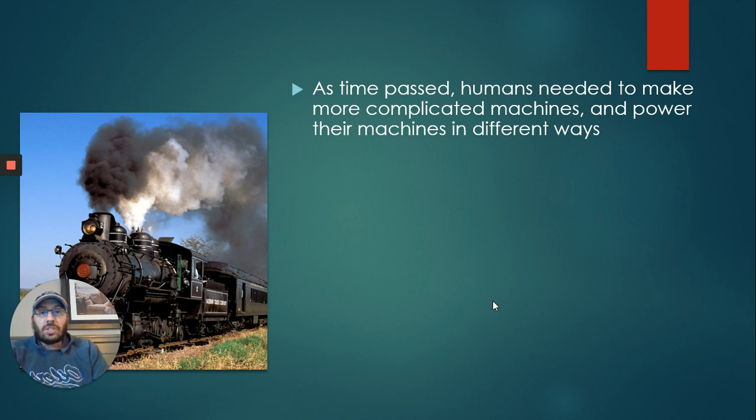Let's go through complex machines. There's a choo-choo train. As time passed, humans needed to make more complicated machines. We just finished talking about simple machines like the lever, the plane, the pulley. Now we're talking about more complicated machines. Because we were starting to make these more complicated machines, we needed to power them in different ways.

Within the last two centuries, a big giant revolution came through, and engineers and inventors developed machines and devices at an amazing rate. These things used energies such as coal, oil, and electricity to run. This new technology and energy sources helped begin the Industrial Revolution. You may have learned about that in social, or you will in the future, but industries changed in a very quick way.

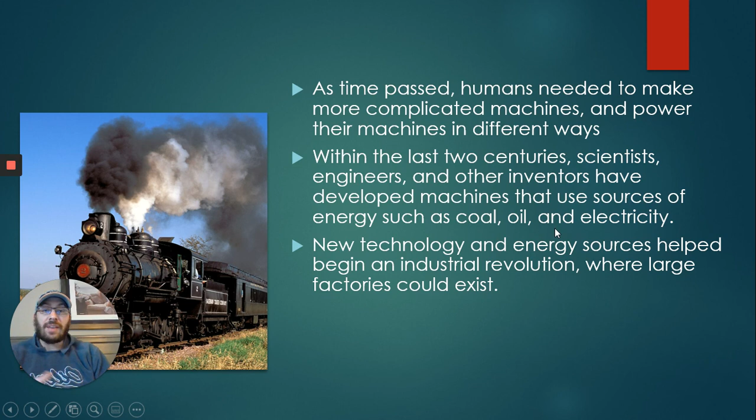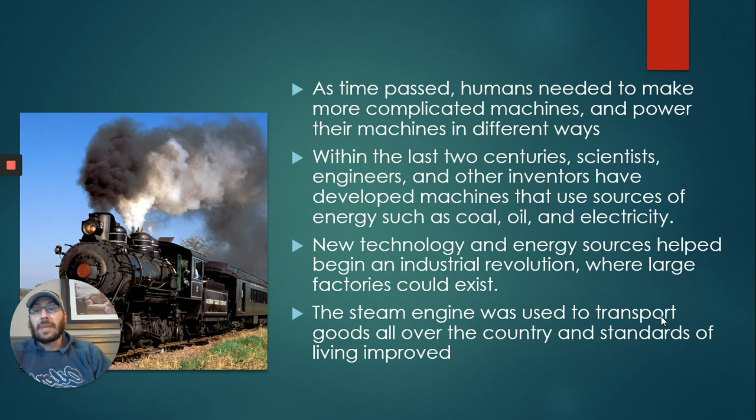Large factories were starting to exist where before there were none. But in order to get to these large factories, we needed machines that went very quickly and very far distances. That's where the steam engine came in. The steam engine was used to transport goods and larger items all over the country, and when something like this happened, the standards of living improved.

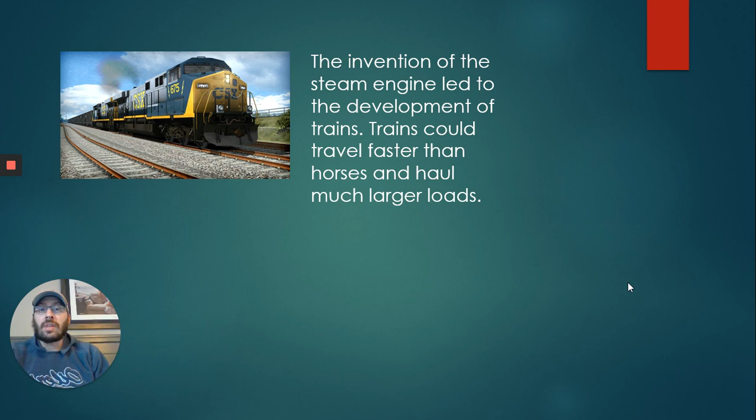Eventually, the steam engines led to trains like we know today. We live in Airdrie, and we have a train that goes right through the city. These trains traveled faster than the horses ever could, and they hauled much larger loads.

If you take a look, the pedals are actually attached to the big tire. The front tire and the back tire weren't attached by anything. You notice there's no chains like the bikes we have today—we're going to be talking about those chains momentarily. The pedals were actually right on the big wheel.

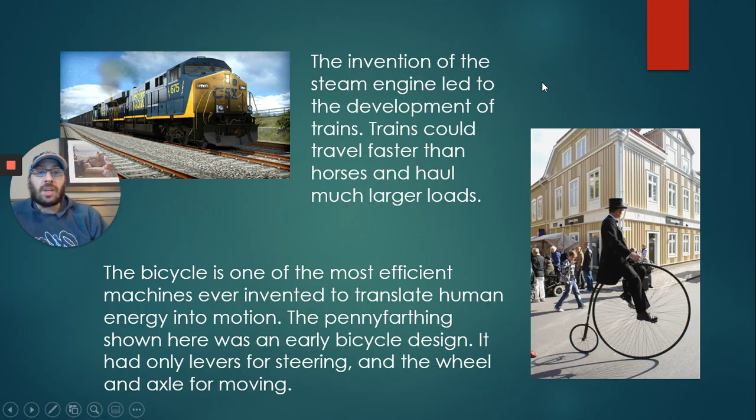So, complex machines notes—if we were in the classroom, I'd be having you guys copy these down. A complex machine is a system in which simple machines all work together.

I like to look at this and think of it like we did with the body systems unit. Remember when we talked about body systems—digestive, respiratory, all those. Those body systems are made up of different organs, like the heart and the liver, and they all work together to make the body system. This is very similar with complex machines and simple machines. Most devices we use today are made up of several simple machines, or organs if you will, and therefore we call them complex machines, or body systems if you will.

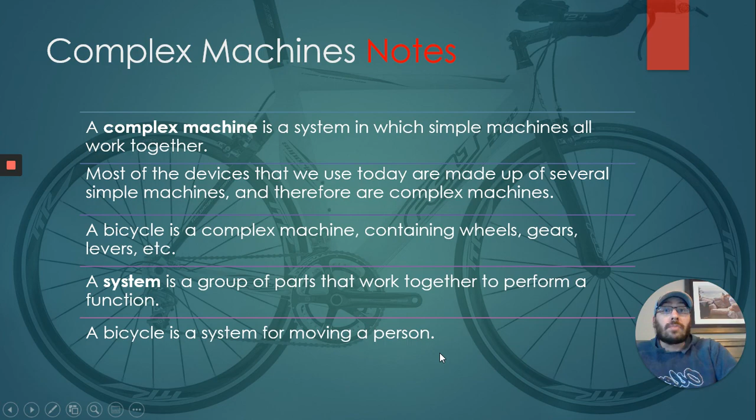So the bicycle is a complex machine that contains wheels, gears, levers, etc. It's important to know that a system is a group of parts that work together to perform a specific function. So the bicycle is a system for moving a person—that's the main use for a bike, to move a person from A to B. Yes, we have fun, exercise, etc., but the main function is to move that person from point A to point B. Within the bicycle are a group of parts that perform specific functions.

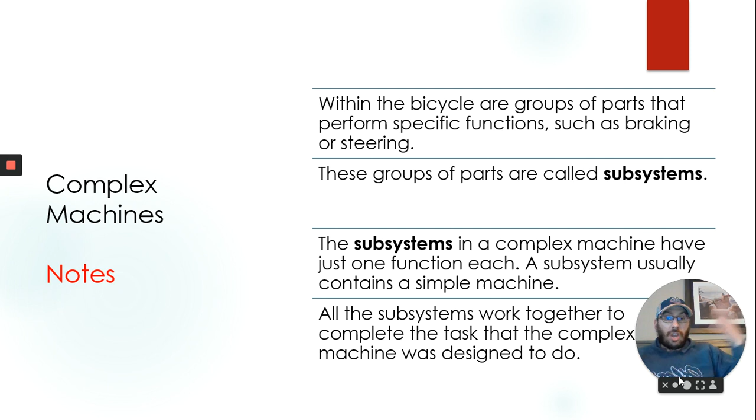Such as braking and steering, and these groups of parts are called subsystems. The subsystems in complex machines typically have one function, and they're usually just a simple machine—kind of like your organs, your heart. All the subsystems work together to complete the task that the complex machine was designed to do. Going back to the body systems, all of the organs of our respiratory system complete the task of getting oxygen into our body and getting carbon dioxide out of it.

So we were talking about the penny farthing and the bike. The penny farthing had the pedals on the main tire, the big tire, and it wasn't connected to the back tire at all. Our bikes today are not like that. As a matter of fact, the pedals are not even physically attached to the wheels, the tires, they are joined via linkages.

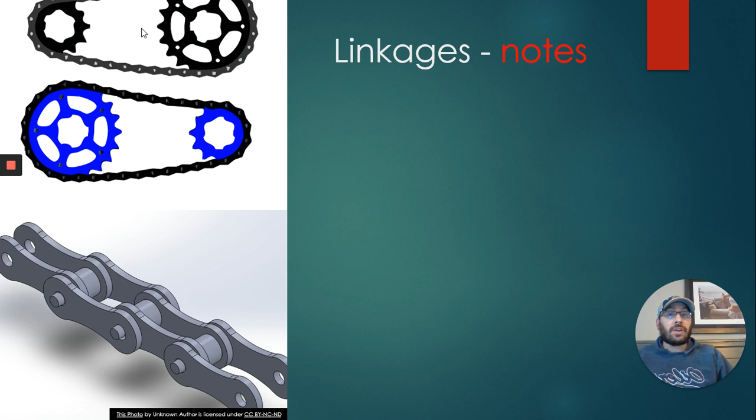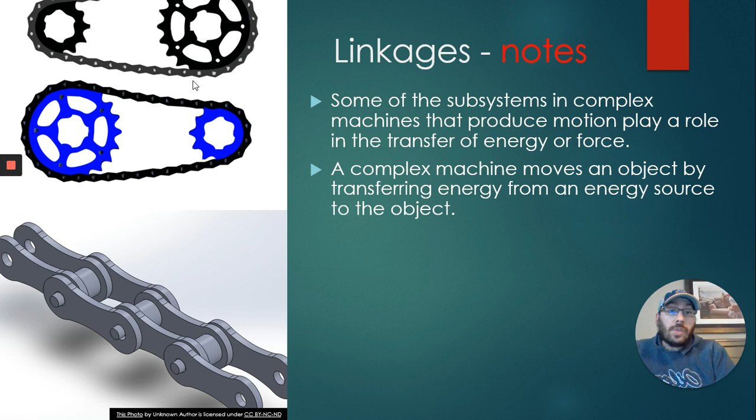Some of the subsystems in complex machines that produce motion play a role in the transfer of energy or force. Complex machines move an object by transferring energy from an energy source to the object. What's the energy source in a bicycle? In a bicycle, we're that energy source. Our pedals, our legs are turning that pedal.

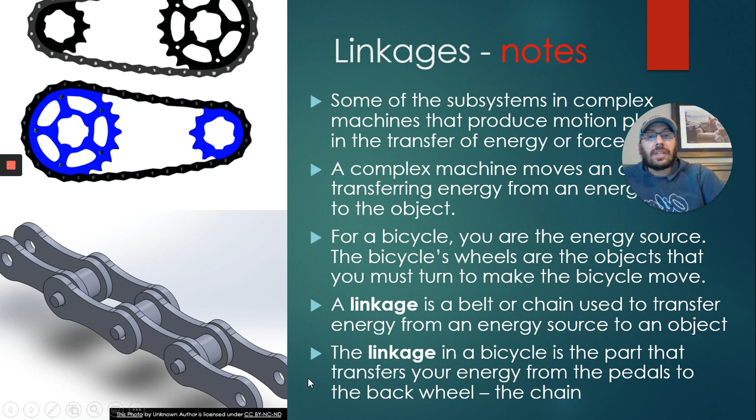So when we're turning the pedal, we need to transport that force, send that force we're putting into the pedals to the wheels. And the way we do that is through linkages. Linkages are belts or chains that are used to take the energy from the power source, in the case of the bike, us, to the object that needs it, the tires. The linkage in a bicycle is the part that transfers your energy from the pedals to the back wheel, and that is the chain, as you can see here.

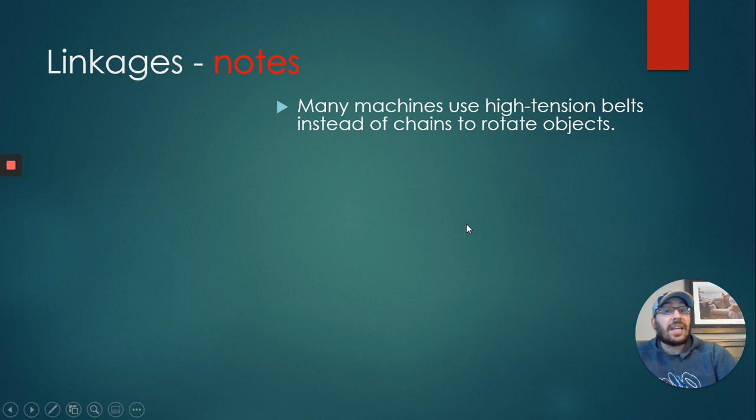More on linkages. Many machines use high tension belts instead of chains to rotate objects. An example is the fan belt in a car. The fan belt is used to spin the fan to help keep the engine from overheating. If you take a look, it's a pretty complex series of wheels and belts that allow the belt to spin that fan.

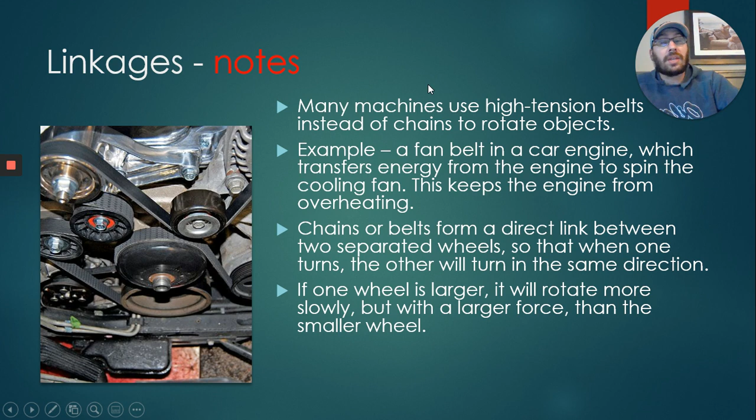Chains or belts form a direct link between two separate wheels, so that when one wheel turns, the other turns in the same direction. These belts create a direct link between the different wheels. If one wheel is larger, which often happens, it will rotate slower but with a larger force than the smaller wheel. So if you have a large wheel and a small wheel, the large wheel with one rotation will obviously go slower, whereas the small one ends up moving a lot faster, but you get greater strength. My robotics students, you've seen this when we were making the robots go faster or slower, making them go up hills, those types of things.

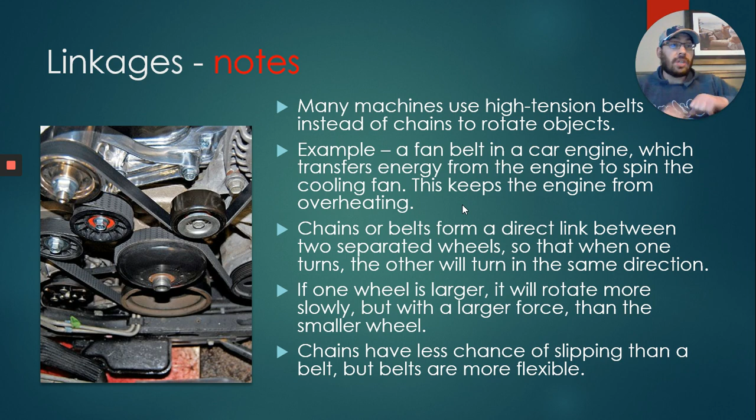The reason we use chains versus belts is that chains have less chance of slipping off because the teeth are held together in the gear teeth, whereas belts could slide off like you see in that picture on the side. However, belts are more flexible, so you can get them into tighter situations.

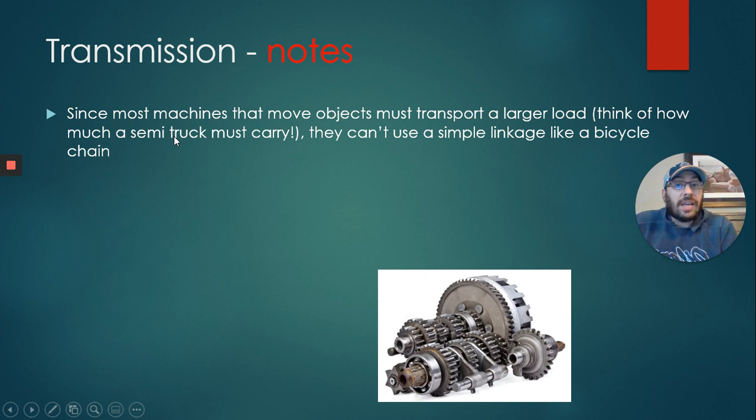Transmissions. We're not going to talk lots about transmissions, but since most machines that move objects must transport a larger load, think of a truck or semi truck compared to a bike, they can't use simple linkages like a bike chain. A transmission is a special type of linkage for transferring energy from the engine to the wheels in large vehicles such as cars and trucks.

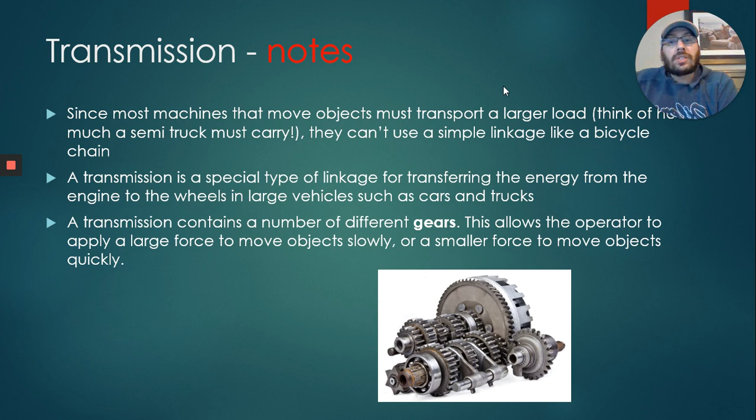You guys have heard about transmissions in your cars. The transmission contains a number of different gears, as you can see in the picture, and this allows the operator to apply a large force to move the object slowly, or a smaller force to move the object quickly.

This is kind of an important section here, and I've got a prop that we can play with. Gears are essential components in most mechanical systems, and they consist of a pair of wheels that have teeth. This is different than chains, the gears actually interlock together.

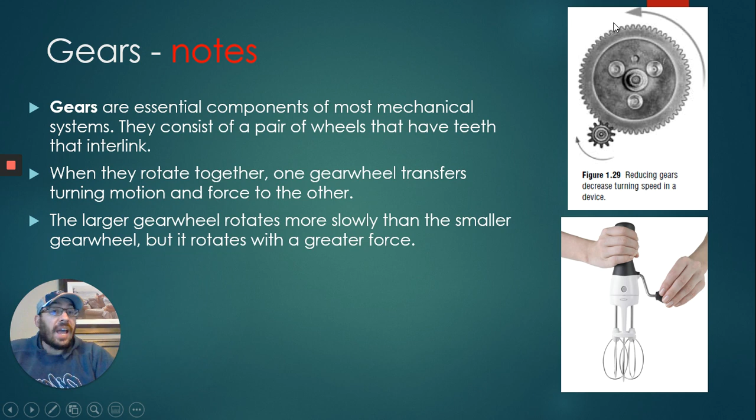When gears rotate together, one gear wheel transfers the turning motion and force to the other. Take a look at the picture: we've got a small gear and a large gear. If this small gear turns one full rotation, the large gear would barely move. But if we take the large gear and move it one full rotation, the small gear ends up turning a whole bunch of times. The larger gear wheel rotates more slowly than the smaller gear wheel, but with greater force. So the larger one moves slowly but has greater force attached to it than the small one does.

Gears can be used to increase or decrease the speed of a machine, for example in cars and bikes. We've seen this when we wanted to go faster and slower on our bikes.

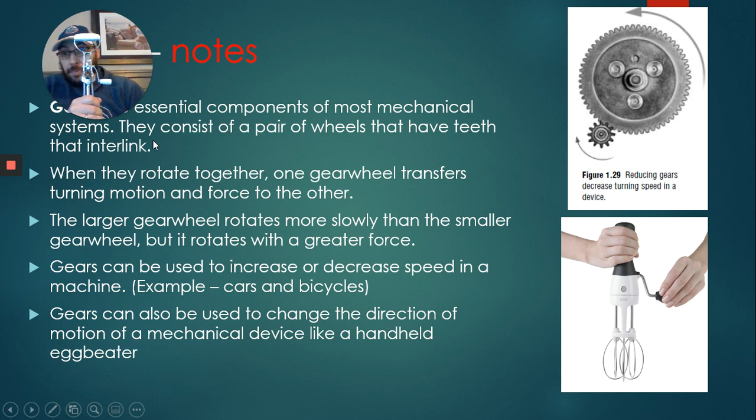Gears can also be used to change the direction of the motion of a mechanical device, like a handheld egg beater. Let me show you quickly. Here's my handheld egg beater, let me make my screen a little bigger so you can see.

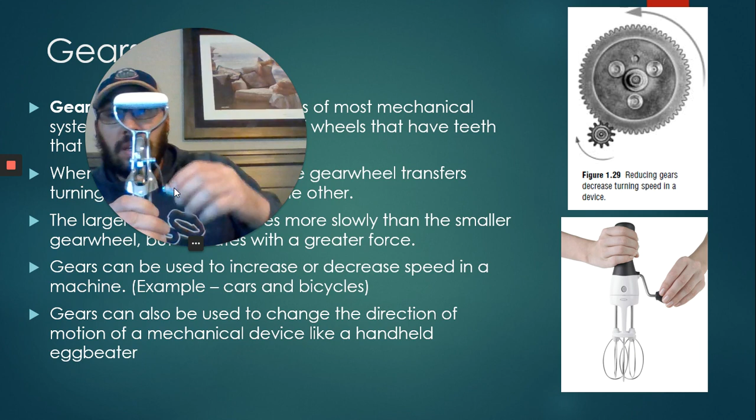What it means about changing direction is I'm taking this and spinning it upwards, so it's a vertical motion. It's still rotational, but it's vertical, moving up and down, and it's causing my egg beaters to spin this way, horizontally. So it changes it from a vertical to a horizontal motion.

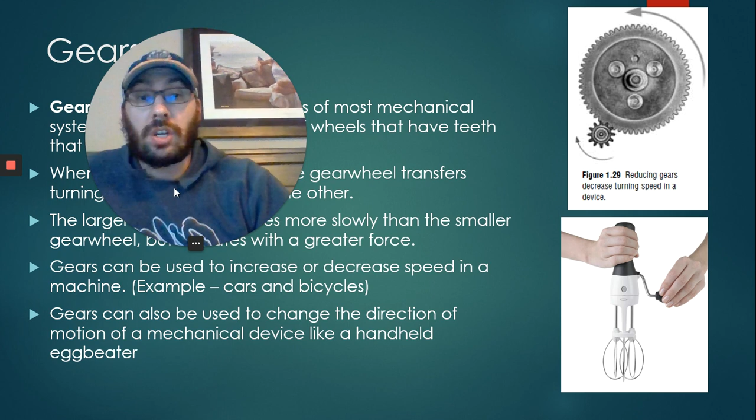We'll talk about how we can change the speed in a second.

So how gears affect speed. Gears like these in this picture increase the speed of rotation of a device. They're called multiplying gears — gears that increase the speed of a device. Reducing gears decrease the turning speed of a device. In reducing gears, the driving gear is smaller and has fewer teeth than the driven gear.

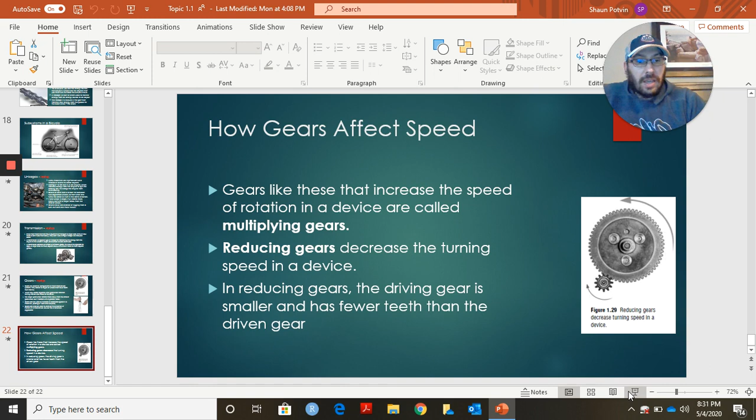I think this is the last slide. Yes it is, so let's go back here and play with the egg beater again. Let's make it bigger again so we can see this with our egg beater.

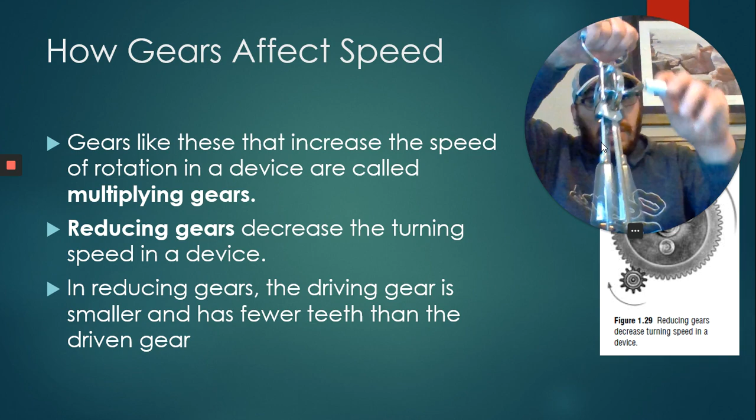With the egg beater, I have my really large gear. If I turn my large gear one full rotation, take a look right in here, you can see two smaller gears. So one rotation with the large gear causes the smaller gears to rotate probably about 6 or 7 times. That means one rotation with the large gear causes the smaller gear to move 6 or 7 times as fast — it's definitely multiplying the speed.

If I take this and make it my main gear instead, and spin this one around one full time, you can see that my large wheel right here does not spin as fast — it spins slowly. But my small ones down here are spinning really quickly. So when you do this, it's going slow, but there's a lot more power going on the upper one.

My robotics students, when we took robotics class, were able to make our robots go really, really quick. If you've seen these Lego robots, they're not the fastest looking things in the world, but you could get them going down that hallway where it would be really hard for us to keep up with them.

But there was a downfall. Whenever you would sacrifice strength for speed, the robots started zooming all over the place. They'd go really fast for a bit, and then boom, they'd bounce right into a wall, because they weren't very stable.

On the flip side, we could switch it so those robots went really, really slow. It's unfortunate you robotics kids aren't doing the sumo challenge, but some of you already realize if you set up the gears so the robot goes really slow, it actually gets a lot of power. So it's going really slow, but it's pushing those other robots out of the sumo mat. So that's it.